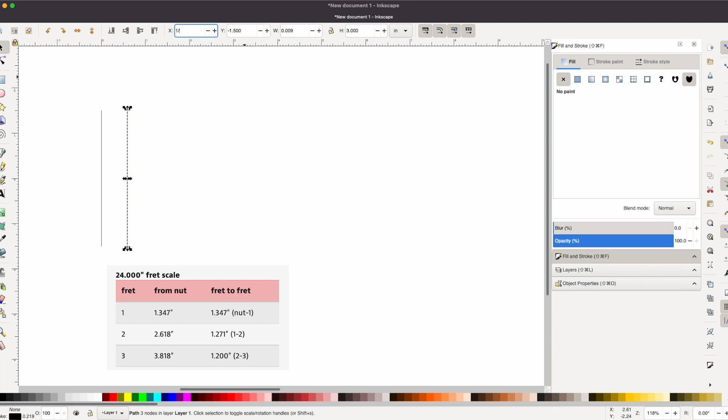So I'm going to copy and paste and make another line, and I'm going to set that at -1.5 on the y-axis. And actually messed up there, and so I'm gonna have to go back and set -1.5 for the y. That keeps it exactly lined up with the other one. And then the x is going to be 1.347 because that's the distance from the nut for the first fret. And then from there on, you're just going to follow that printout.

Make sure that each fret is -1.5 to keep them lined up, and then you're just going to type in the x value for whatever the next fret should be distance-wise from the nut, and then you're going to lay them all out until you get to the 22nd fret, and then you're going to have your frets laid out. And now I'm going to come in and number these just because it's easy. I didn't show that part, so all you need to do is just use the text function on here and just number the frets. It'll be easier as you go forward.

And now I'm going to drag a guideline from the top down. And like I said earlier, I'm going to set this at 0 so that it is right in the middle of each of those lines, because I want it to be dead on in the middle so that when we lay out our inlays later, it'll be easy.

Now you're going to drag more guidelines in from the left, and you're going to place those where all of your inlays will go. And so now that we have those kind of in a general area, we're going to get them exactly in the middle because we want to line up our inlays off of that. So the distance between fret 4 and 5, as you can see, is 1.069. So you just take that 1.069, divide by 2, and that's going to give you exactly half.

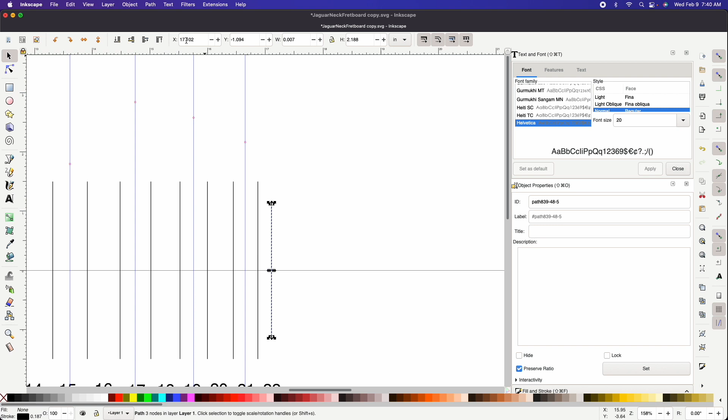And the width of the neck here after the 22nd fret needs to be 2.188. And again, you can set this however wide you want your neck to be. This is what I decided on. And so make sure it's at the center line and it's the right distance away from that other fret. And then once you've got that set and you know it's centered, then you can simply connect these two together. So just draw a line connecting one to the other.

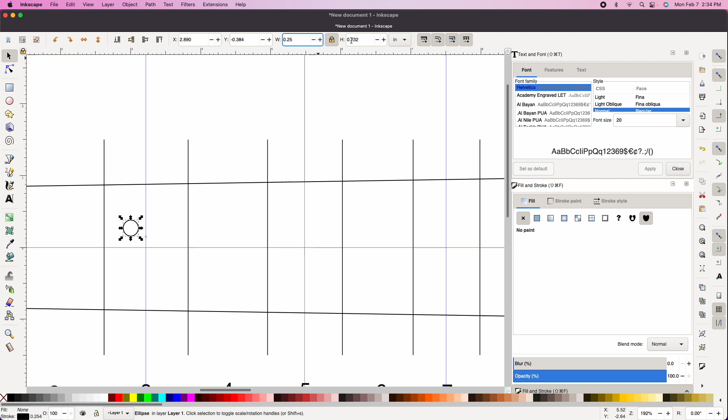And next you want to lay out your inlays. And so this is basically just drawing circles and making sure that these circles are the size that you want your inlays to be. Typically inlays are 1/4 of an inch in diameter. So I'm going to set this at 0.25 and then I'm going to basically copy and paste. And just make sure these snap to the center point, copy and paste them, and put them on each fret except for 12. Because 12 is where you're going to do the double dot inlay.

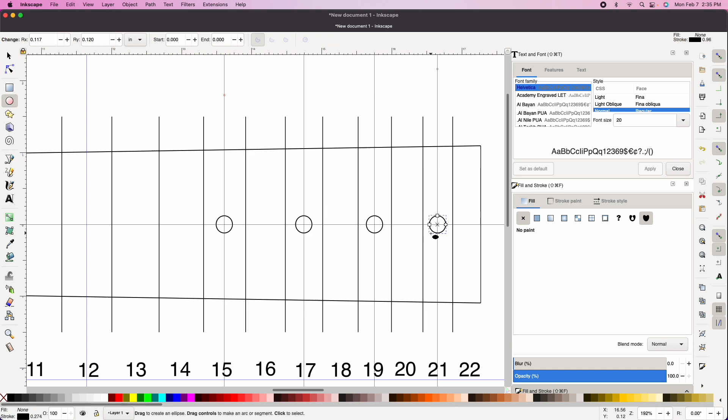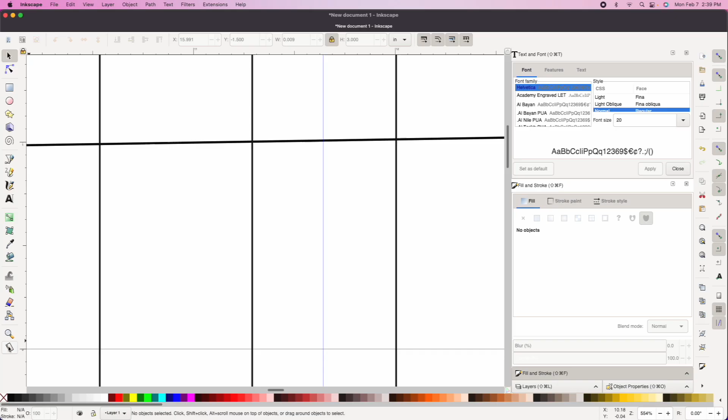And now with the 12th fret, it's going to be a little different because you've got your center line between frets 11 and 12 drawn, but now you need center lines between the outside edge of the neck and the center line. So you're going to measure that, and from the center to the outside is 1.007. So you want to take 1.007 and divide that by 2. And I messed up and did 1.07, so my calculation was wrong here. But just be careful when you're doing that. I went back and fixed it, but for this video, it's a little bit off.

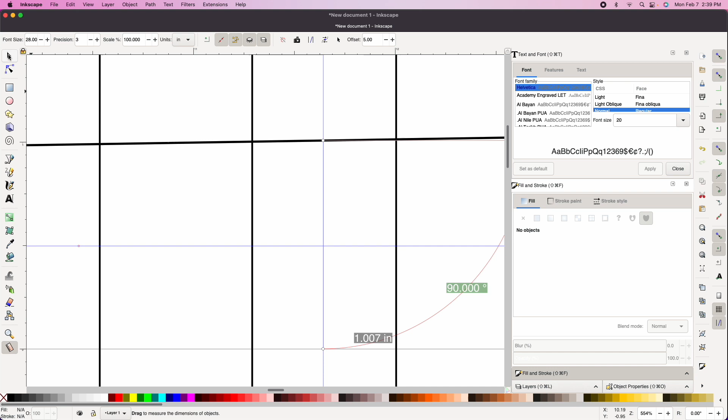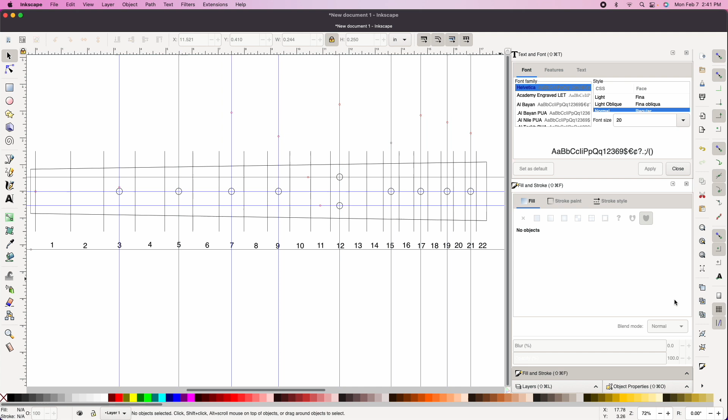So you're going to take the center point of that, and again, you're going to just use that actual number you got because you're coming off of the center line, which is 0. Then you're going to set those guidelines at the correct distance, and then go ahead and grab another circle, copy it, paste it, make sure you snap it to the center point that you just created, and then your 12th fret inlays are also done. And so that's how I laid out my fretboard for the guitar I'm going to build.